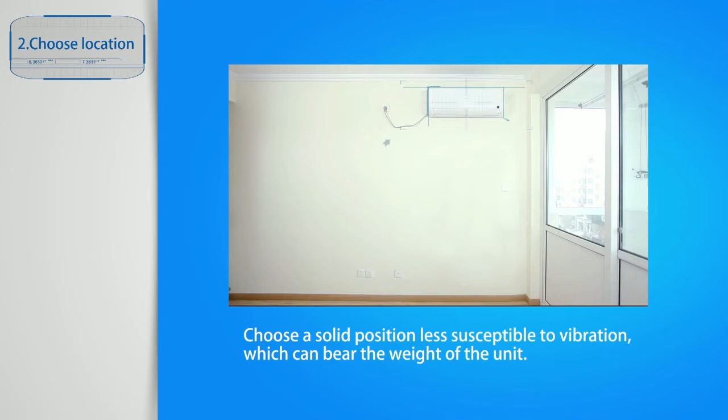Unpack. Unpack the box. Check whether the accessories and connection cable are correct and complete. Choose location. Choose a solid position less susceptible to vibration, which can bear the weight of the unit. Choose the place where the unit can be serviced easily. Ensure the outdoor drain does not inconvenience neighbors.

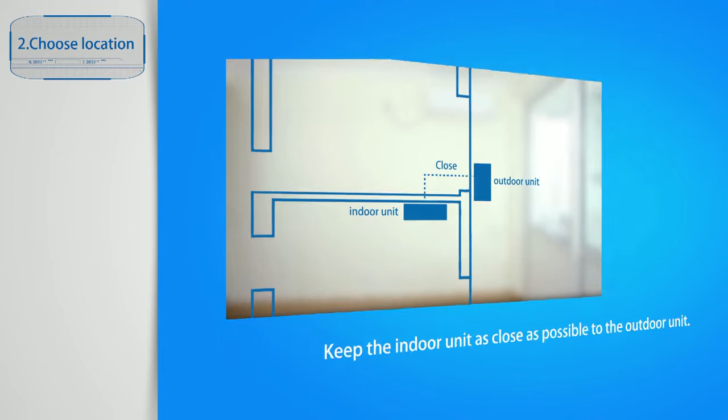Keep the indoor unit as close as possible to the outdoor unit. Choose the position where the indoor unit can blow air to the whole room. The indoor unit shouldn't be installed over a TV, computer, or other electrical appliances, or valuables.

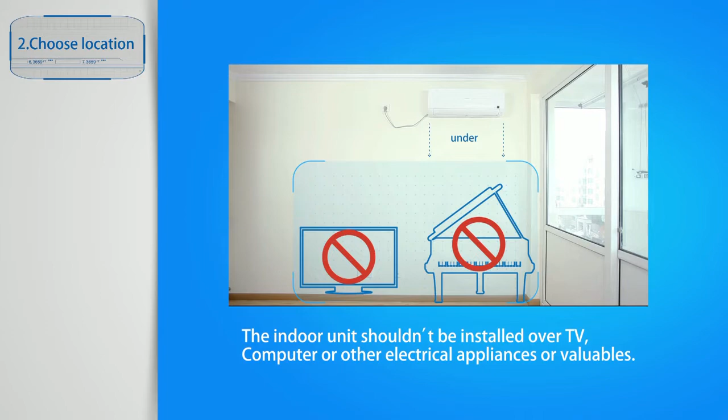Test. Power on the indoor unit. Check whether it can run normally, and whether the remote can control the indoor unit. Drill the wall hole. Choose the drill position. Hole drilling. Drill a hole of a diameter 63 mm with a percussion drill.

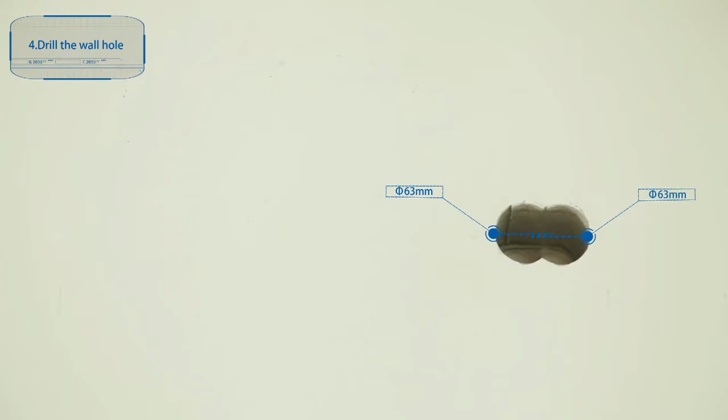For the unit with bidirectional fresh air function, you should drill 2 holes with a center distance of 40 mm. Then form an ellipse hole with a size of 60 by 100 mm. Angle the drill with a downward pitch to the outside wall so that the outside hole will be 5 cm lower than the inside hole.

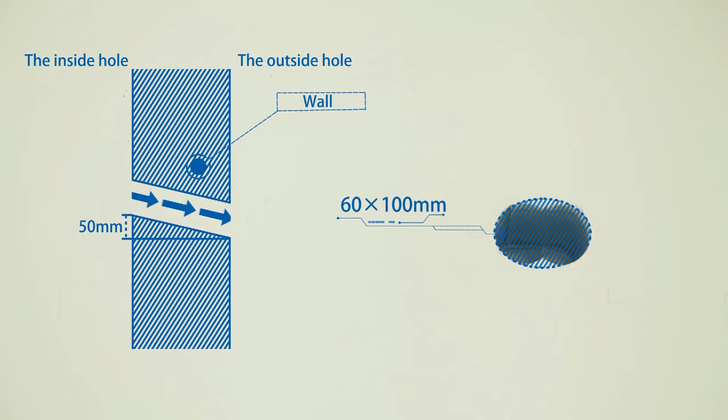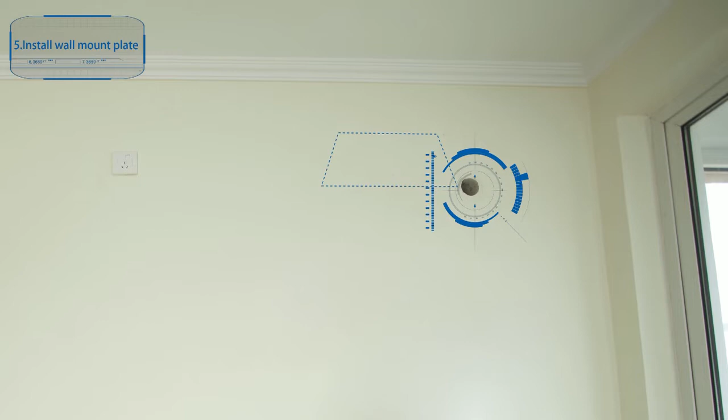Install wall mount plate. If the room has a reserved wall hole, please ensure the plate position according to the hole. Ensure the installation position of the indoor unit. Determine the position by the customer's requirement or the trend of the connection pipe. The distance from the top of the indoor unit to the ceiling should be more than 10 centimeters.

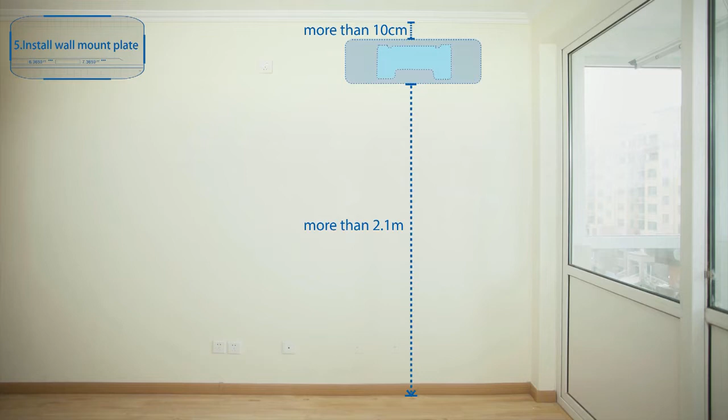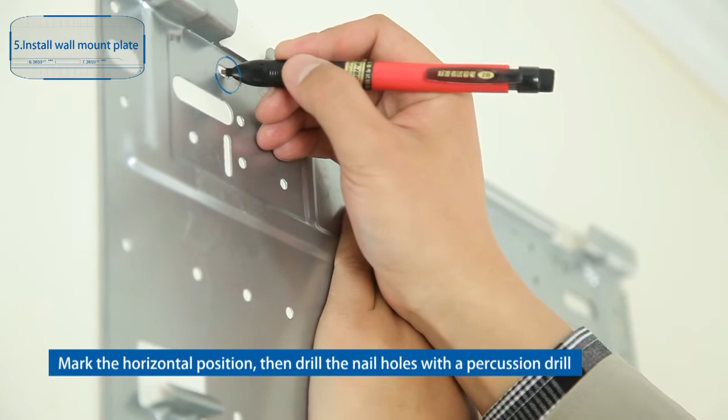From the bottom of the unit to the ground should be more than 2.1 meters. And from the top of the unit to the ceiling should be more than 10 centimeters. Find the horizontal position with a gradienter. Mark the horizontal position, then drill the nail holes with a percussion drill. Next, put expansion plugs into the hole.

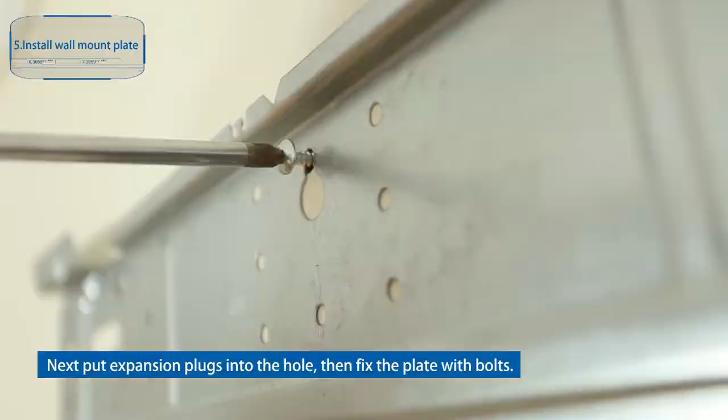Then fix the plate with bolts. This only applies to concrete walls. For other kinds of walls, please consult a professional or training manager. Connect the cable and pipe for the indoor unit. Connect the cable. Insert the cable through the cable hole from the back side.

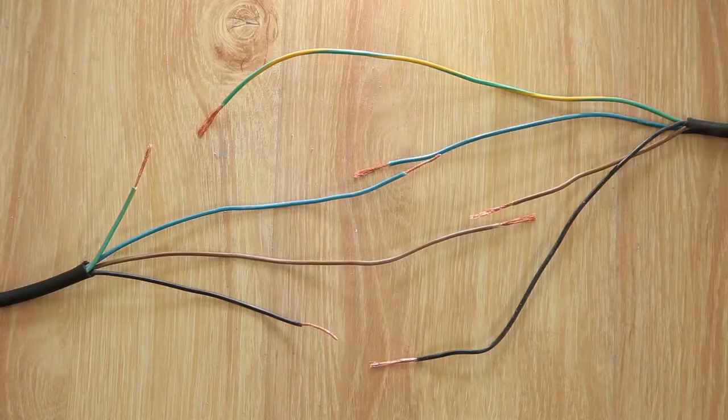Fix the cable terminals on the terminal block. The power wire, signal wire, and ground wire should be in their correct positions. If you need to extend the wire, the joints should be mutually staggered approximately 10 centimeters, and the joint should be wrapped approximately 5 centimeters with insulating tape.

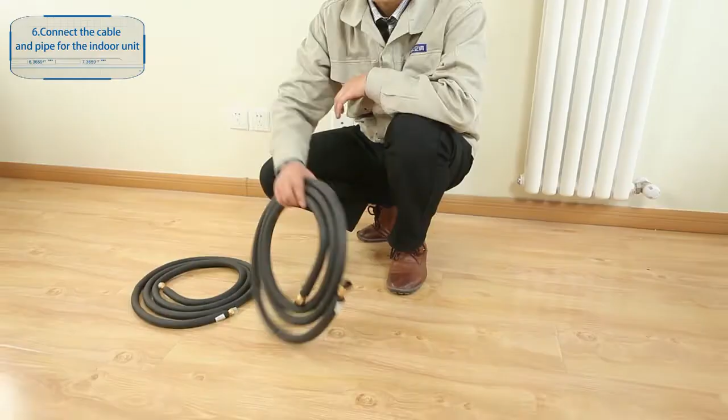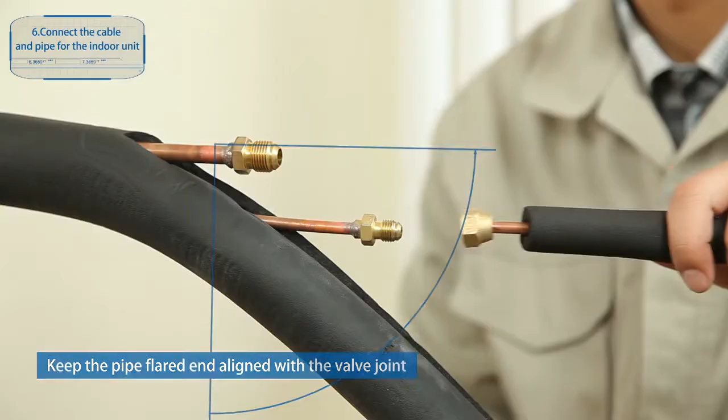Pipe connection. Check whether the pipe is intact. Remove the pipe cover. Keep the pipe flared end aligned with the valve joint and tighten the nut. Do not let dust, sand, or water get inside the pipe. Note: the pipe can only be extended by welding, and after being extended, you should add refrigerant.

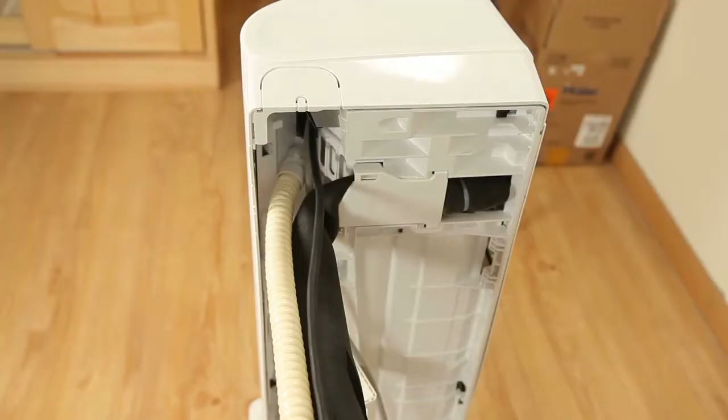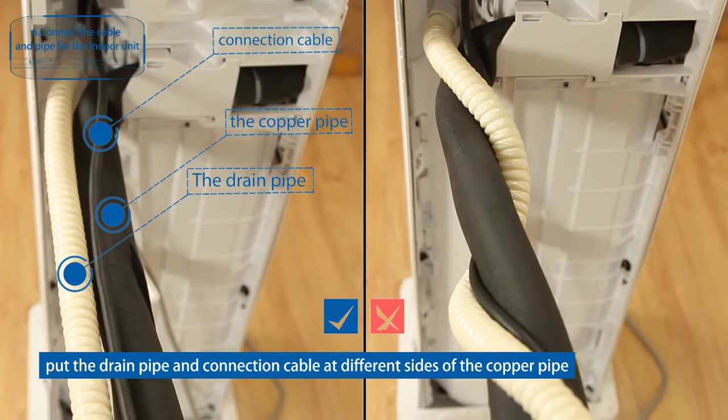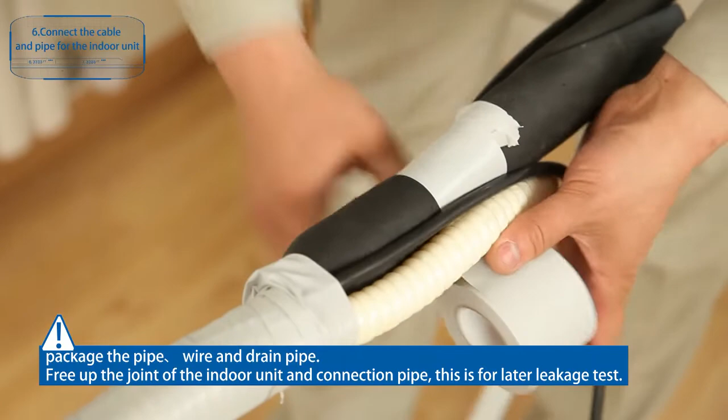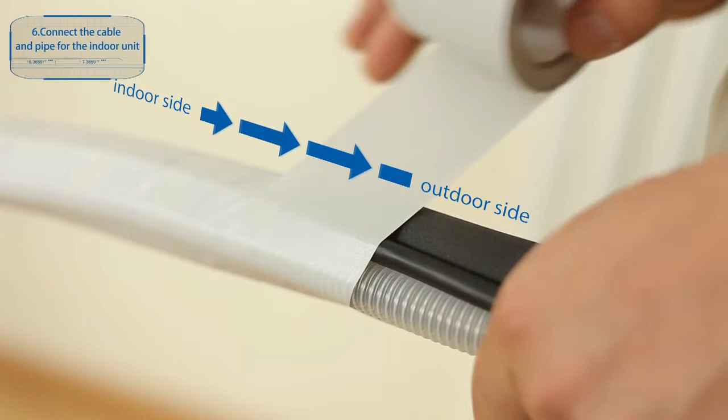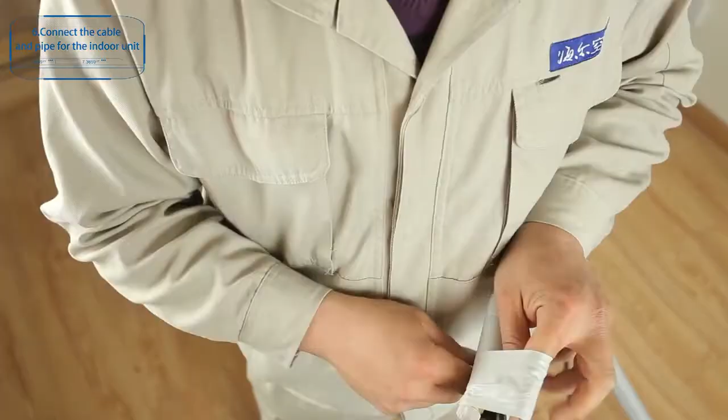Pack the gas pipe and liquid pipe separately at the end of the outdoor side. Package with non-adhesive tape from the indoor side to the outdoor side. Slant the tape and make it straight. The overlaps should be 1/3 the width of the tape. Package the connection pipe separately at approximately 30 centimeters to the end.

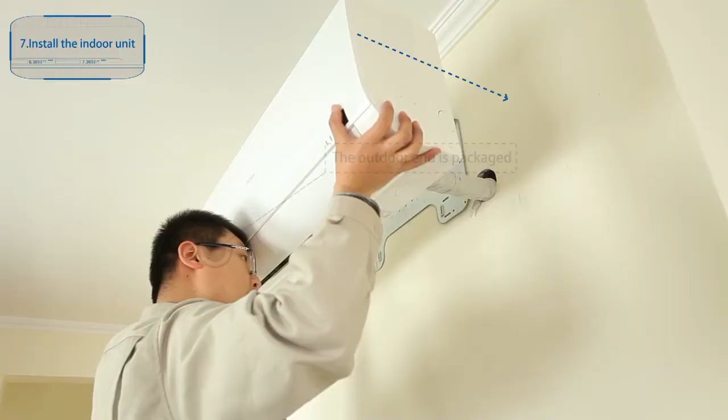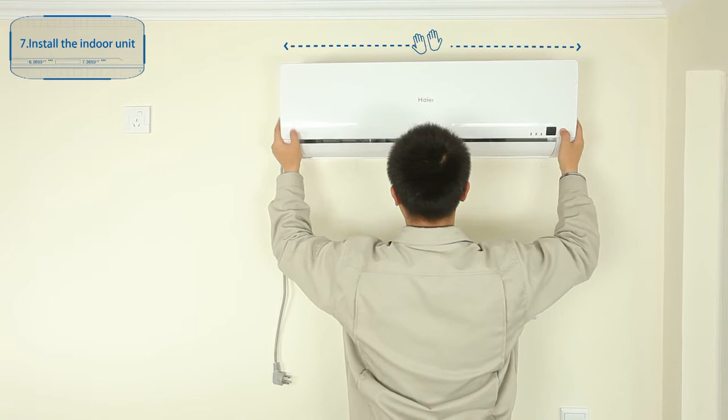Install the indoor unit. Check whether the outdoor end is packaged. Put the indoor unit close to the mount plate and pass the pipe carefully across the hole at the same time. With the top of the indoor unit closer to the wall, hang the indoor unit on the upper hooks of the mounting plate. Slide the unit slightly side to side to verify proper placement of the indoor unit on the mounting plate. If the outdoor unit is higher than the indoor unit, you should add a water trap.

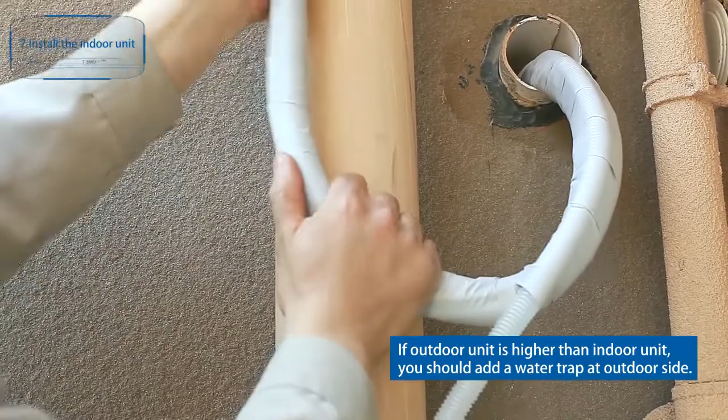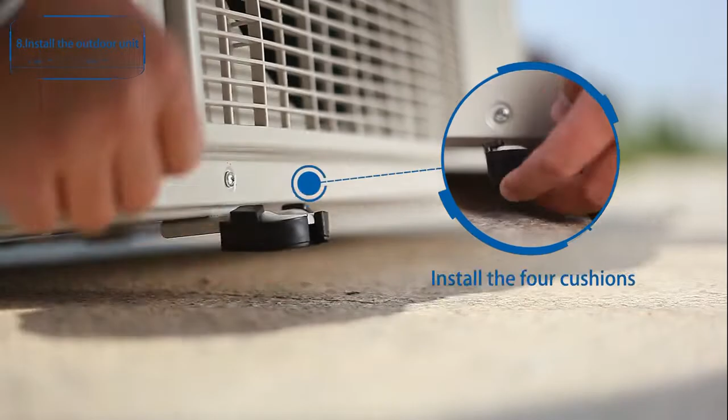Install the outdoor unit. Install the drain elbow on the bottom plate. Install the 4 cushions. Fix the outdoor unit with 4 bolts. Fix the back side first, then fix the front side. Connect the outdoor pipe and wire.

Pipe connection. Put the gas pipe and three-way valve in a line, tightening the nut gently. Prepare for emptying. Tighten the liquid pipe to the two-way valve and fasten with a wrench. Be careful not to overexert, otherwise it will destroy the flaring.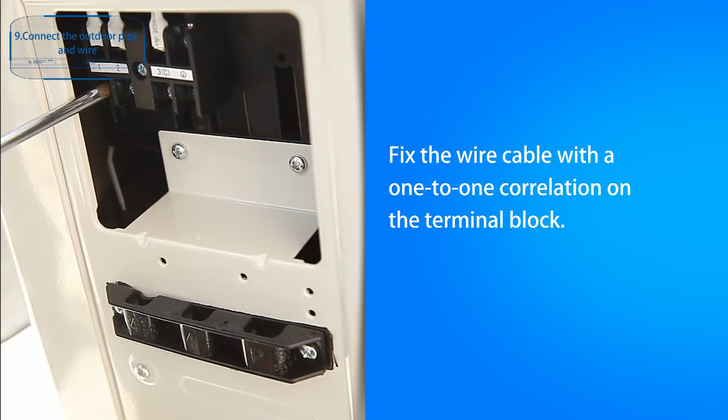Fix the wire cable with a 1-to-1 correlation on the terminal block. Check the connection is correct. Then fix the wire clip.

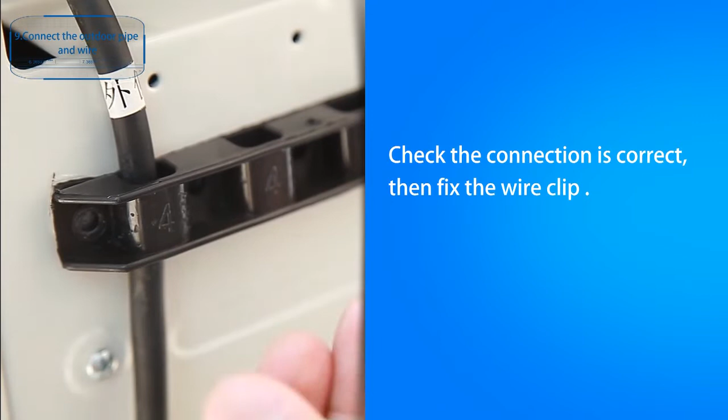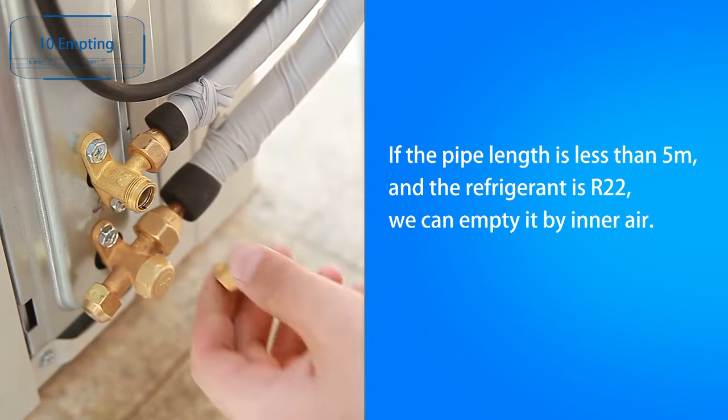Emptying. If the pipe length is less than 5 meters and the refrigerant is R22, we can empty it by inner air. Remove the two-way valve cover. Unscrew the three-way valve nut about 1 to 1.5 revolutions. Unscrew the two-way valve to 90 degrees.

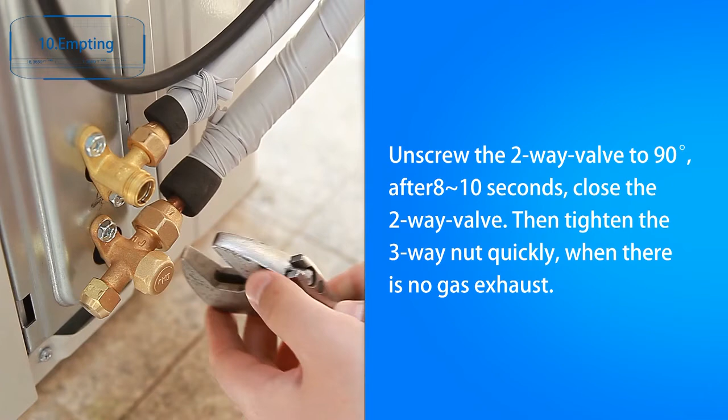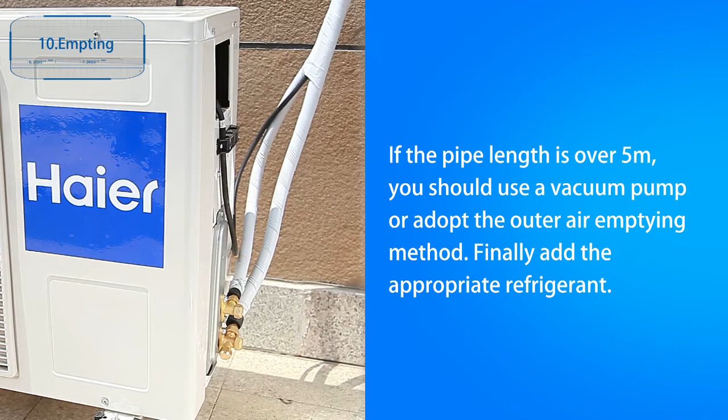After 8 to 10 seconds, close the two-way valve. Then tighten the three-way nut quickly when there is no gas exhaust. Open the two-way valve and three-way valve. Close the valve covers. If the pipe length is over 5 meters, you should use a vacuum pump or adopt the outer air emptying method. Finally, add the appropriate refrigerant.

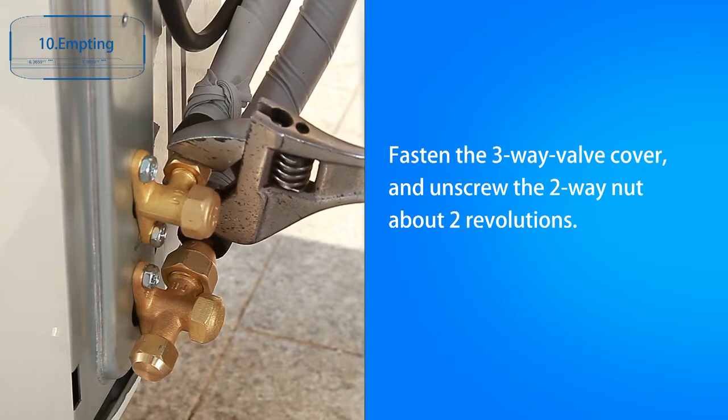Empty it by outer air. Fasten the three-way valve cover and unscrew the two-way nut about 2 revolutions. Connect the refrigerant cylinder and three-way valve with an adapter. Open the refrigerant cylinder, and when there is cool air exhaust from the two-way valve, close the refrigerant. Tighten the nut until there is no air exhaust from the two-way valve.

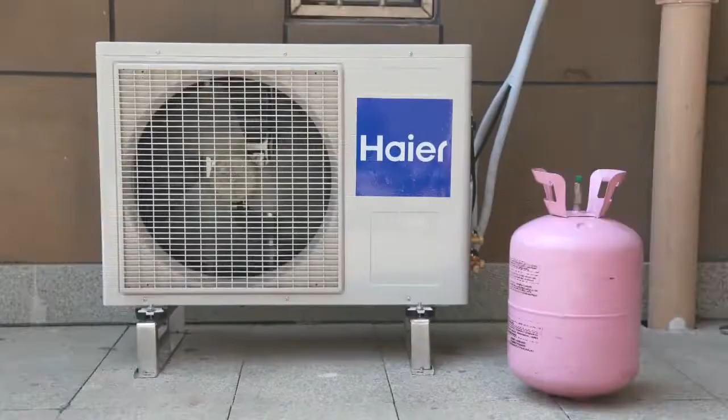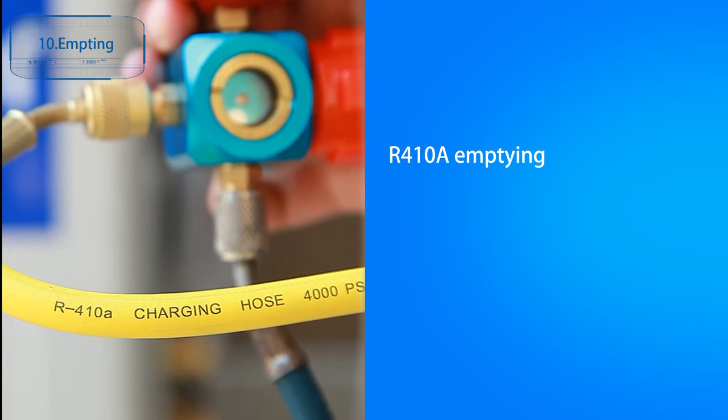For R407C, R410A refrigerant should use the vacuum pump. And if there is R32 refrigerant, please consult a professional for assistance. R410A emptying. Connect the outdoor unit pressure gauge and vacuum pump with an adapter pipe. Keep the three-way valve closed. Start the vacuum. Keep running for approximately 15 minutes.

When the gauge is down to minus 0.1 MPa, close the low pressure valve, stop the pump, and maintain for 1 to 2 minutes. If the gauge pointer doesn't go back, it means there is no leakage and the vacuum is finished. If the pointer goes back, it means there is a leakage. You need to fix it and vacuum again.

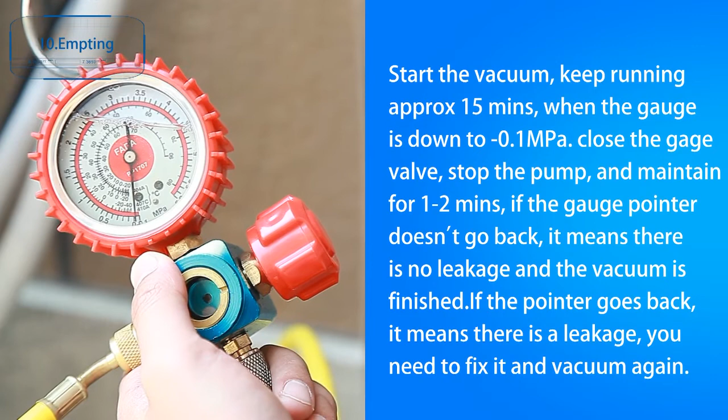Open the two-way valve and three-way valve. Remove the adapter pipe. Fasten the valve covers. Check the joint leakage. If there is a leakage, you should regain the refrigerant and fix the leakage. Notice: please use specialized adapter pipe and pressure gauge.

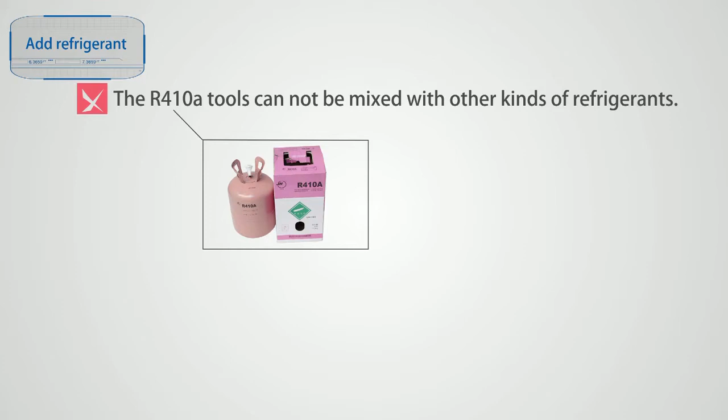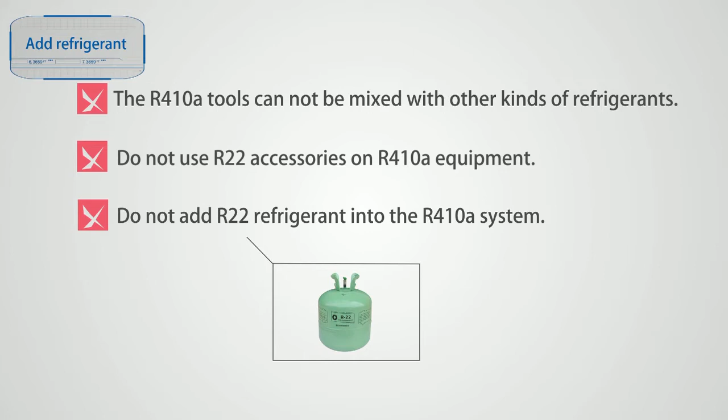Add refrigerant and extend pipe for R410A. Attention! The R410A tools cannot be mixed with other kinds of refrigerants. Do not use R22 accessories on R410A equipment. Do not add R22 refrigerant into the R410A system. Do not add too much refrigerant at one time. The correct way is charging multiple times and in small quantities.

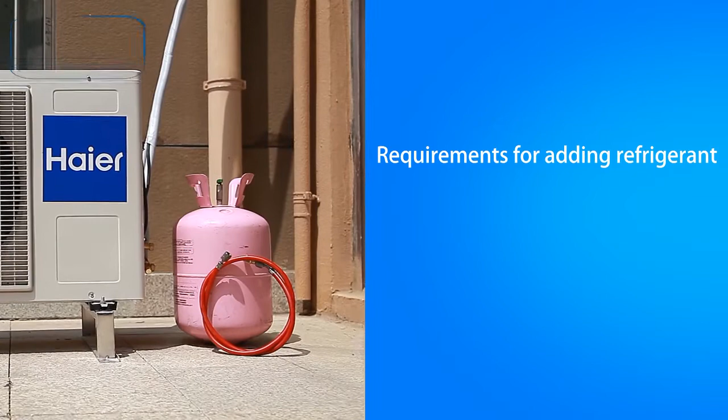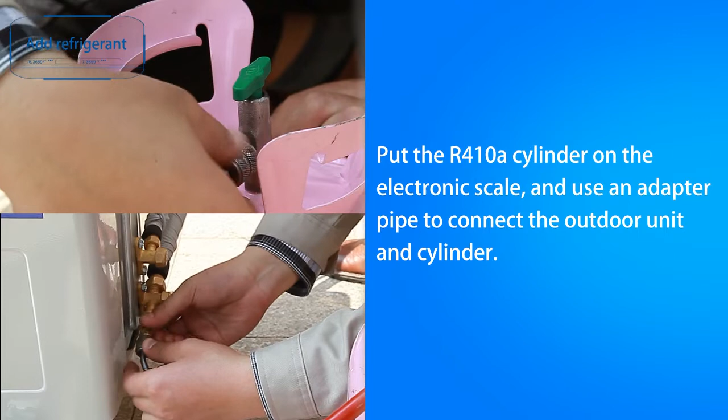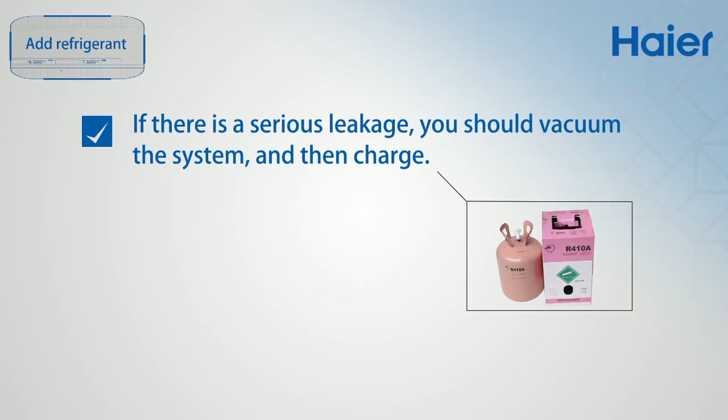Requirements for adding refrigerant. Put the R410A cylinder on the electronic scale and use an adapter pipe to connect the outdoor unit and cylinder. Keep the cylinder erected. If there is no siphon tube inside, you should keep it upside down. If there is a serious leakage, you should vacuum the system and then charge. Generally, the refrigerant cannot be charged if the refrigerant quantity in the cylinder is less than 10%.

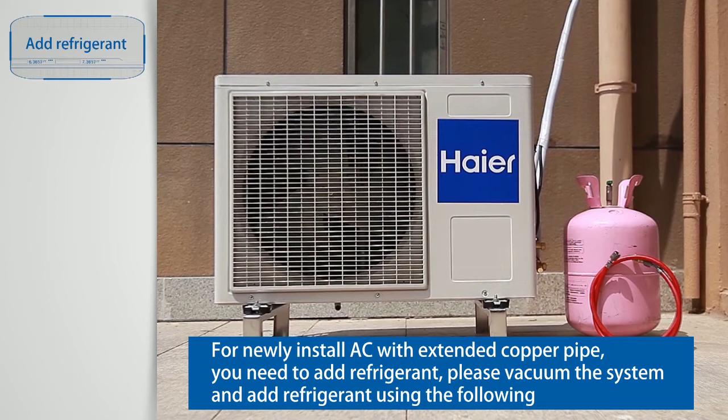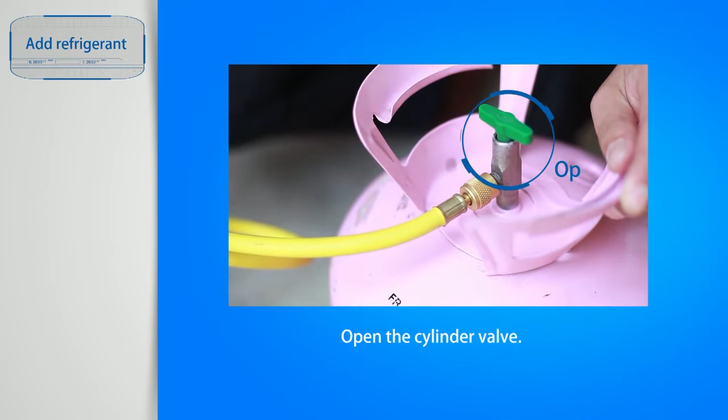Adding refrigerant. For newly installed AC with extended copper pipe, you need to add refrigerant. Please vacuum the system and add refrigerant using the following. Put the R410A cylinder on the electronic scale. Close the gauge valve and connect the adapter pipe. Open the cylinder valve. Adjust the electronic scale number to 0.

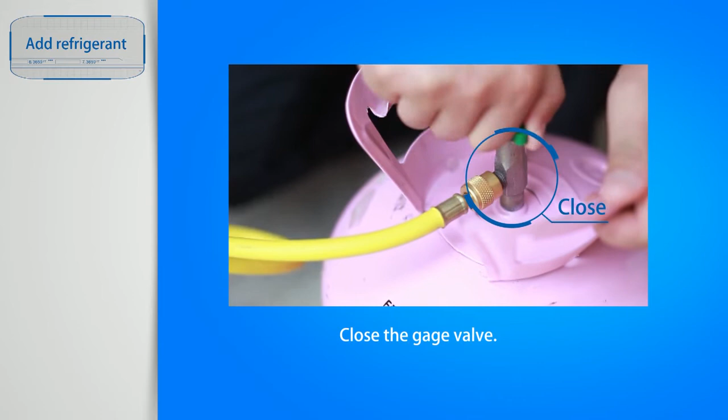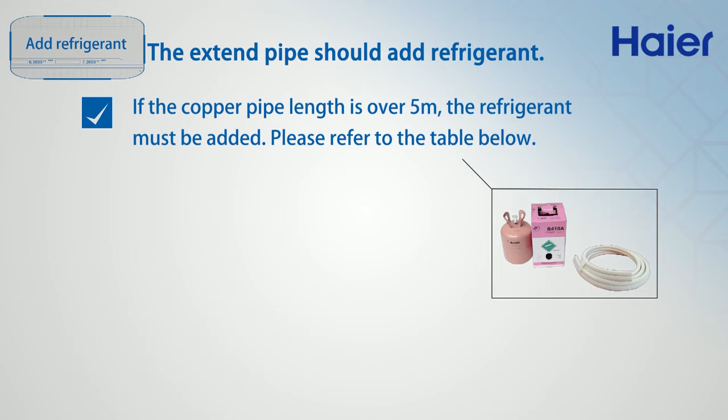Then open the gauge valve to charge refrigerant. Control the quantity by the scale. Close the gauge valve. Remove the adapter pipe. Close the valve and check for any leakage. The extended pipe should add refrigerant. If the copper pipe length is over 5 meters, the refrigerant must be added. Please refer to the table below. The added quantity is 20 grams per meter. For every 1 meter increment, you should add 20 grams of refrigerant.

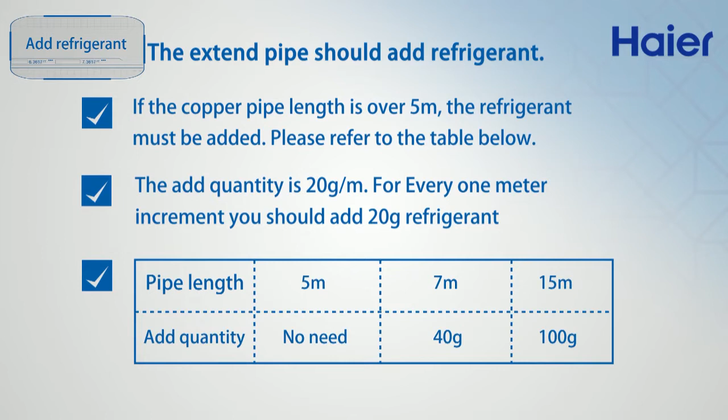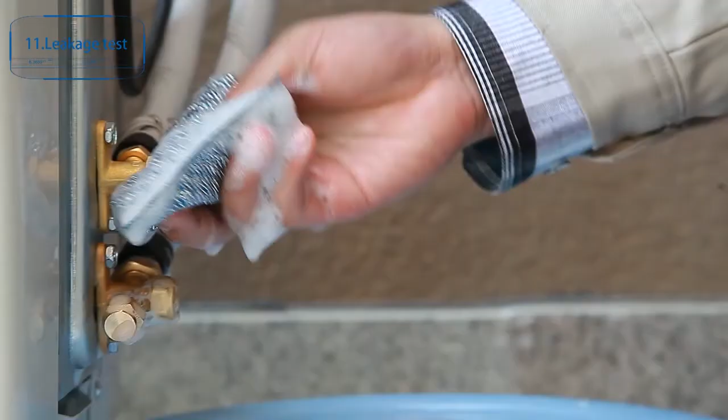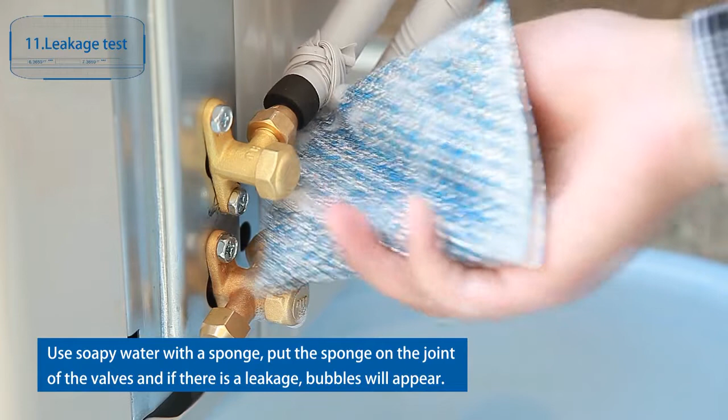Leakage test. Use a halide leak detector. Put the probe close to the pipe joint. It will sound an alarm or a light will flash when the system has leakage. Start the unit and set to heating mode, and put a soap water sponge on the pipe joint. Use soapy water with a sponge. Put the sponge on the joint of the valves, and if there is any leakage, bubbles will appear.

At every position, you should stay for over 3 minutes. If the system has any leakage, please stop the unit and make repairs. Notice: heat mode is better to help find leakage points. For multiple split type, before doing the leakage test, you should power on all units.

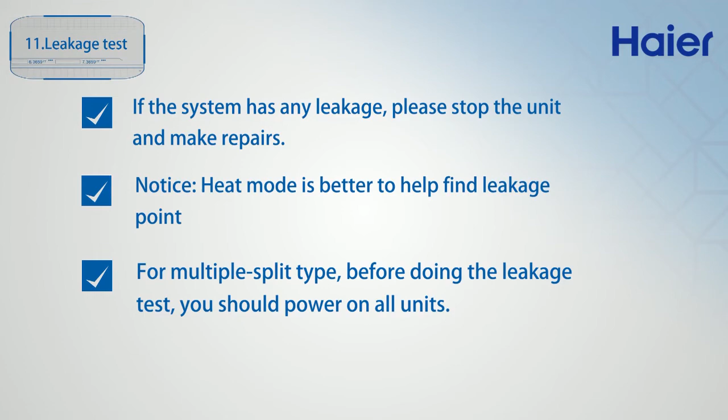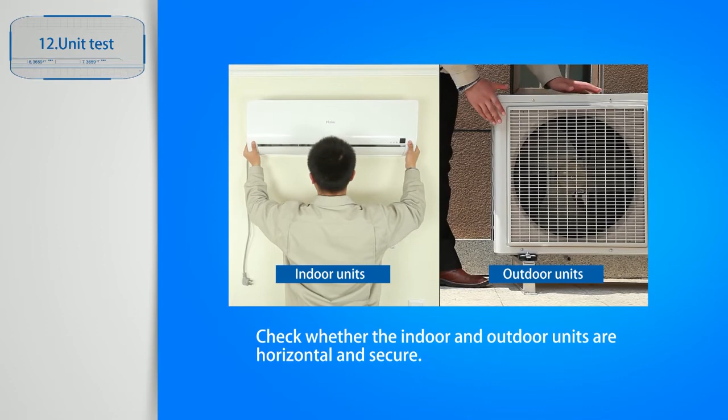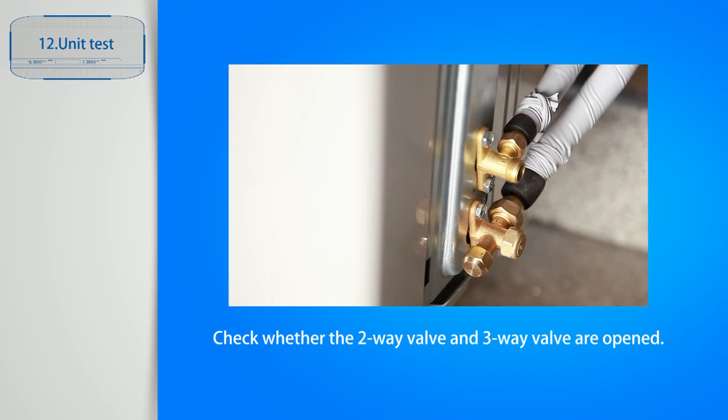Unit test. Check whether the pipe and cable are packaged. Check whether the ground wire is connected. Check whether the indoor and outdoor units are horizontal and secure. Pour some water on the evaporator. Check whether there is any water leakage. Check whether the two-way valve and three-way valve are opened.

Fill hole. Choose an appropriate container to fill and process the gypsum powder. Fill the hole with gypsum powder.